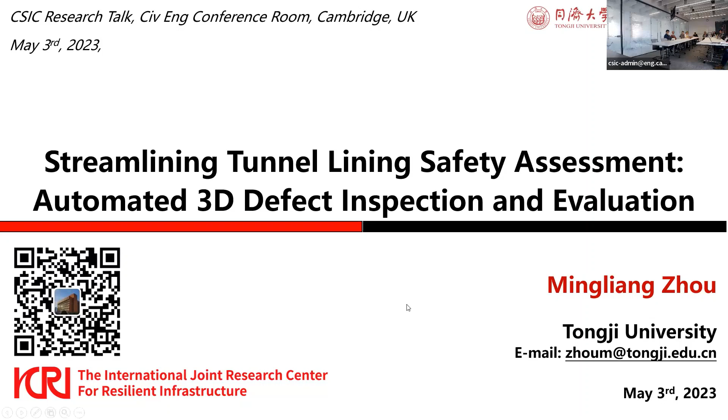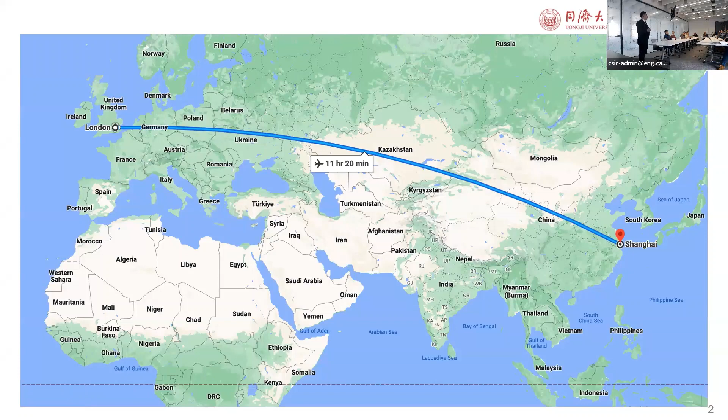For those of you who haven't been to Shanghai, I would like to invite you all to go. It's about a 12-hour direct flight; if not, maybe take another extra few hours. We have a nice campus. This is the main campus in the city, not far from the city center, about 20 minutes away.

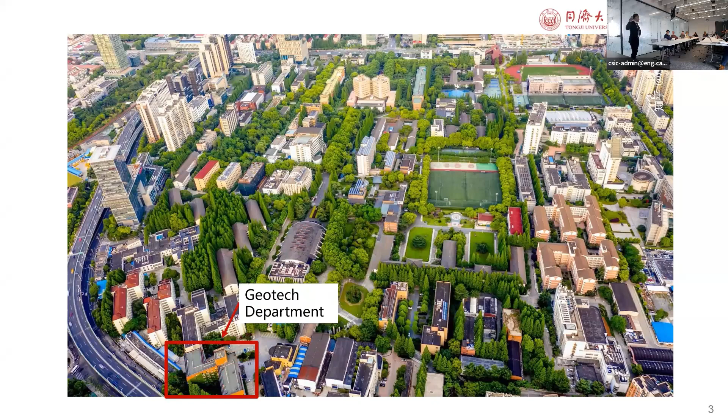We have a metro station just in front of the gate of the main campus called Tongji Station. We have the Civil Engineering College and the Geotech department, and we also have a centrifuge just opposite the main building. It's a quite nice campus.

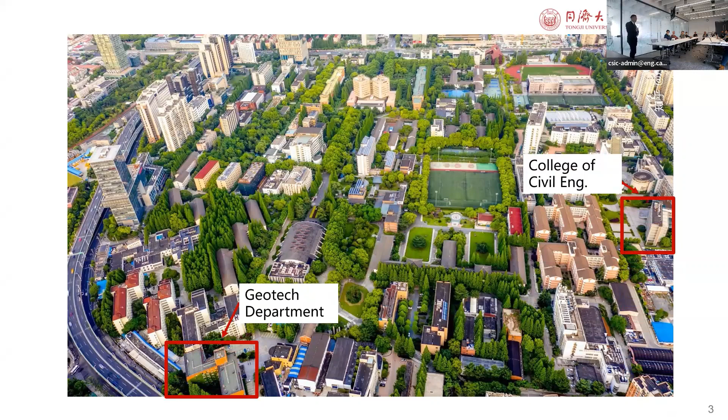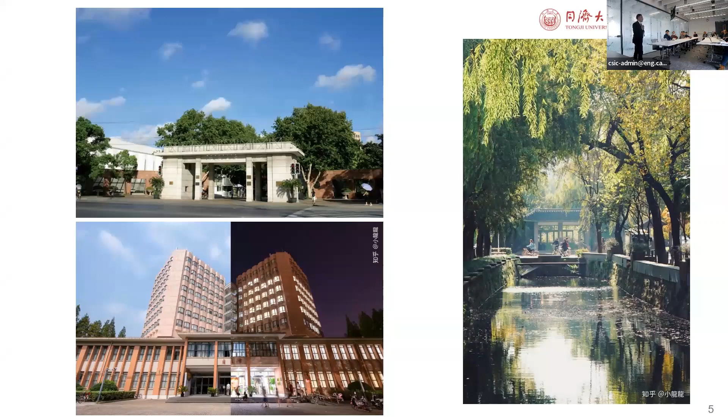We just passed the cherry blossom season about a month ago, so if you have a chance, you should go around the end of March or early April. We have nice gardens, and this is a library, and that's the front gate. Just to give you a flavor, you should visit at some point.

I think it would be nice to introduce my background and let you know a little bit about myself. As Brian introduced, I did most of my study in Cambridge. I did my BA at Caius, and I was a college member with Caius.

Then I did computer vision with Kenichi for my MPhil project, and my PhD was funded by a Japanese company called JOGMEC on methane hydrate production, where I did multi-physics simulation.

Then I went on to a company called Mole Solutions, which specializes in underground logistics. Back then, Professor Robert Mair was a really good friend of the company and was really supportive of this idea of putting all the logistics into underground pipelines.

Then I decided to move back to Shanghai and join the tunneling group, and I did a postdoc with the group. Then I stayed at Tongji Civil Engineering College as faculty. So that's my brief background.

For my topic today, I think for those of you who have worked with tunneling or not, in tunneling, especially in cities, we often face this type of disturbance from excavations. You always want to build buildings nearby or do excavation for a new tunnel. That's typical in Shanghai. I'm sure that happens in London sometimes too, but not as often as in Shanghai. Surely every mega city faces this type of problem.

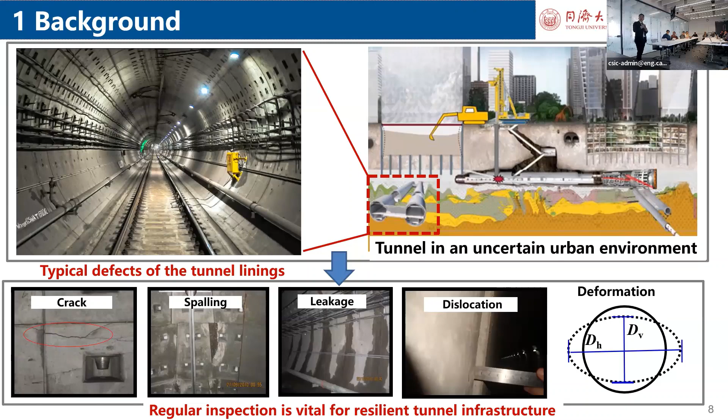As infrastructure ages, in tunnels you always face these types of defects: cracks, spalling, leakage. And if it's a segmental shield tunnel, then you also have dislocations and typical deformations.

Back in the days when I did the MPhil project with Kenichi, we did manual inspection. You'd go down the tunnel at midnight and use your own eyes to try to identify cracks or leakages, and take total station measurements if you had them.

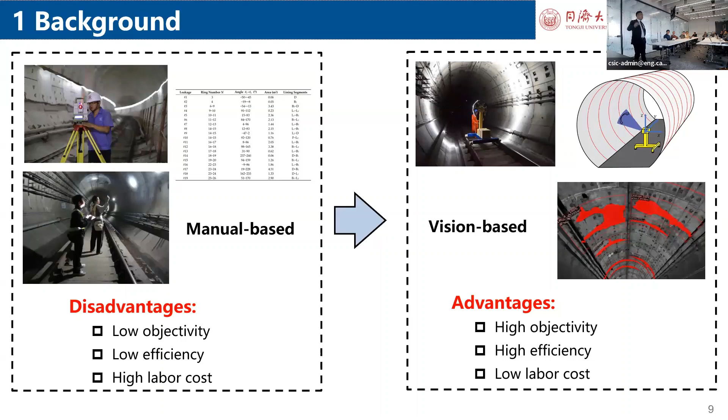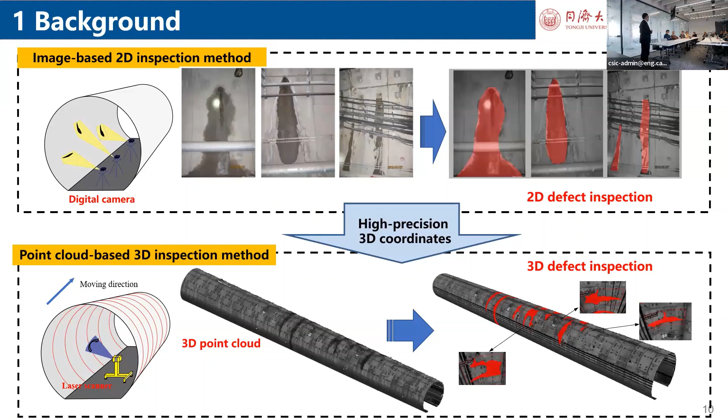But nowadays, for the last decade or so, a lot of researchers have advanced the technology to do vision-based inspection, either with cameras or laser scanners. There are two typical approaches: you either take 2D images and try to identify where the cracks or defects are, or lately a lot of focus has been on 3D inspection, trying to obtain the whole picture and location of the defects.

For defect inspection at Tongji, we used the Topospec Z+F profiler, a German company's product. We built a small EV to carry that profiler's laser scanner to get the cross sections of all the tunnel linings and obtain the point cloud data.

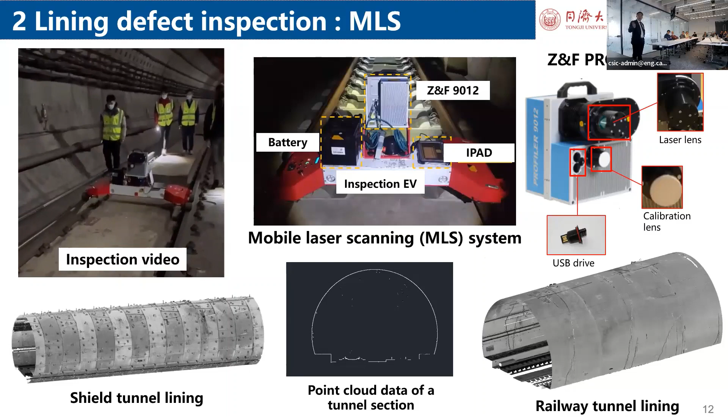So this is very efficient, and you can get a really nice amount of data from the shield tunnel. And based on the data, you can do data analysis about the deformation, because it's a profiler - each cross section, each minute, gives you about 1 million points.

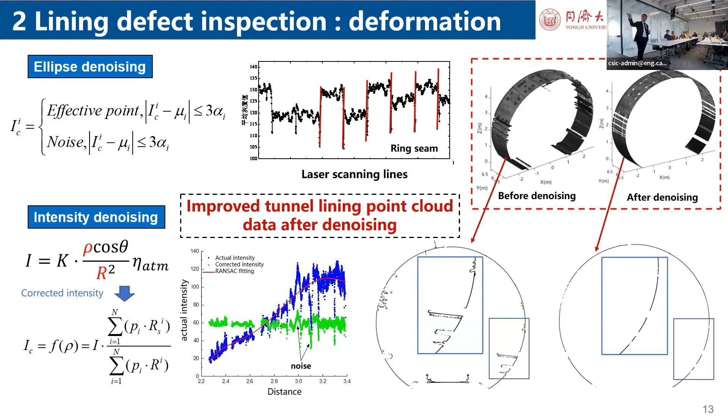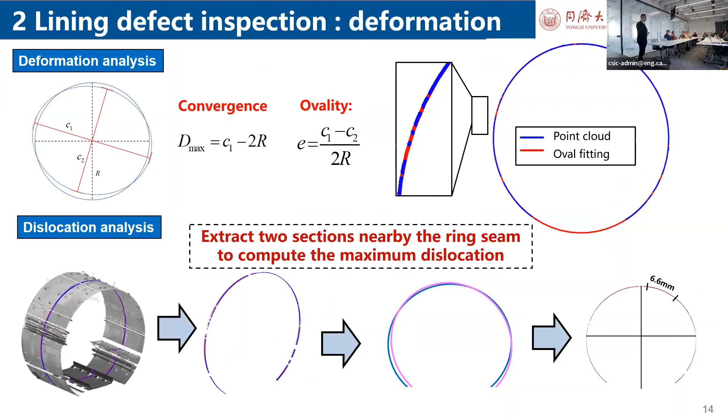So for a typical shield tunnel, we usually make some assumptions of the possible shape. Ellipse is always the logical one to go first. If you do some surface fitting and point cloud denoising, you'll be able to get a pretty good shape of the shield tunnel. Then you can calculate the convergence of the tunnel, and also extract the segments next to each other to work out the dislocations. That's for the deformation part.

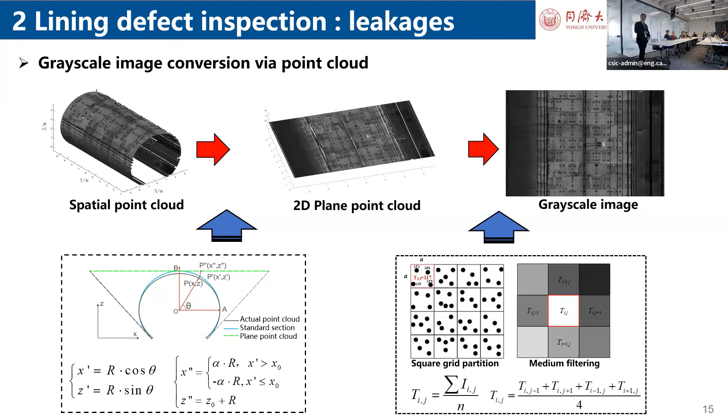Moving on to some of the surface defects, leakage is an example. As point cloud data, one of the good things is you can convert it into a 2D grayscale image, because the point cloud from the laser scanner is essentially the intensity or reflectivity of the surface. So you can convert that into a grayscale image and use typical image analysis, or nowadays we use a lot of deep learning algorithms to extract your target object.

Here we specifically used Mask R-CNN - that was proposed by Facebook about 5 years ago. We used this specific algorithm but upgraded it for the specific task of leakage detection. This differs from typical image segmentation tasks because we know the sense of the location.

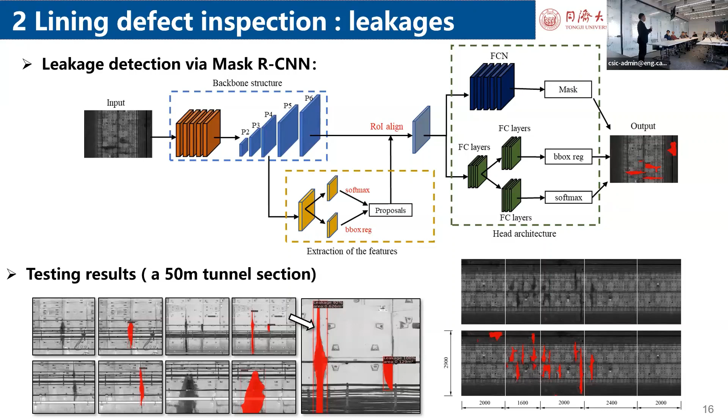Because the laser scanner gives you the location of each point, you'll be able to calculate the leakage area as well as its location. So from that whole process, you can tell exactly the leakage area and where the leakage is located at your cross section, which segments. With that, you can generate a report of the leakages.

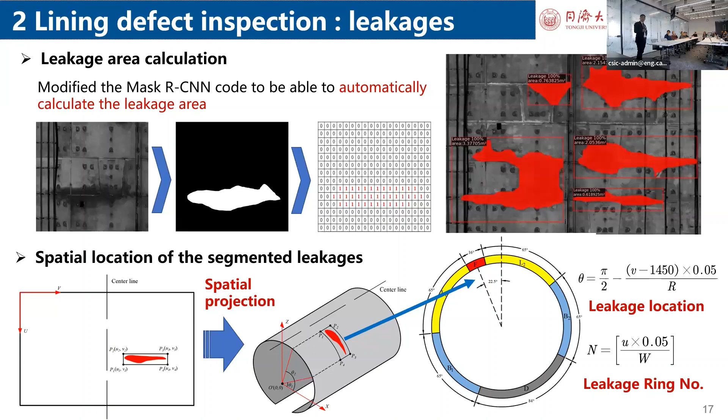Another typical problem for the tunnel is spalling. Spalling is, in fact, a 3D defect. But most of the time, if you only take an image, you'll treat it as 2D. If you treat it as 2D, first of all you won't get really good segmentation results, and second, you won't be able to extract the volume of the spalling. So you won't be able to provide the operational company of the metro tunnel with strategies for maintenance of that spalling defect.

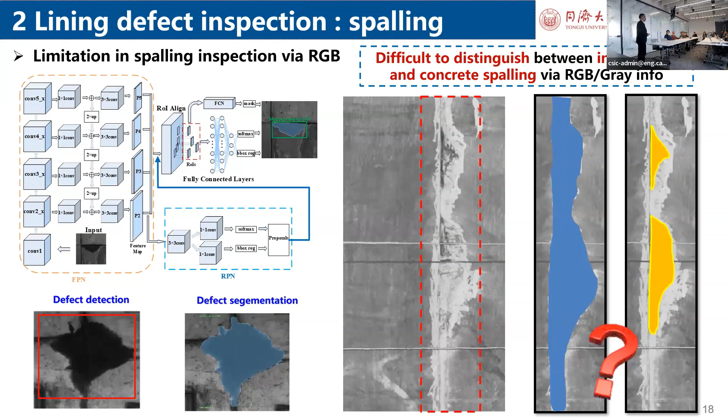To address this issue, we proposed a new network called StreamNet. The idea is basically combining the intensity image, or grayscale image, from the point cloud together with the depth image. Because the laser scanner can give you the dimension in XYZ, you'll be able to convert your data in that direction to a depth image.

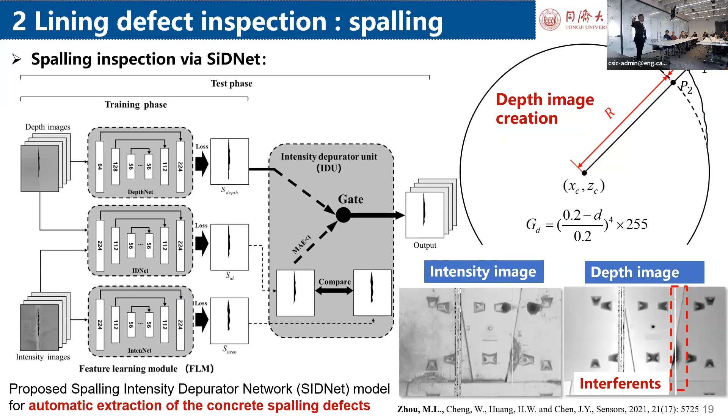With that, for each spalling defect, you'll have one intensity image as well as a depth image. Then we created this specific network to combine the depth image and the intensity image, fusing the prediction results to give you a better sense of where the spalling defect is. With that, you'll be able to calculate the 3D volume of that specific spalling defect. And as we compared with some state-of-the-art deep learning and image processing techniques, we got better results.

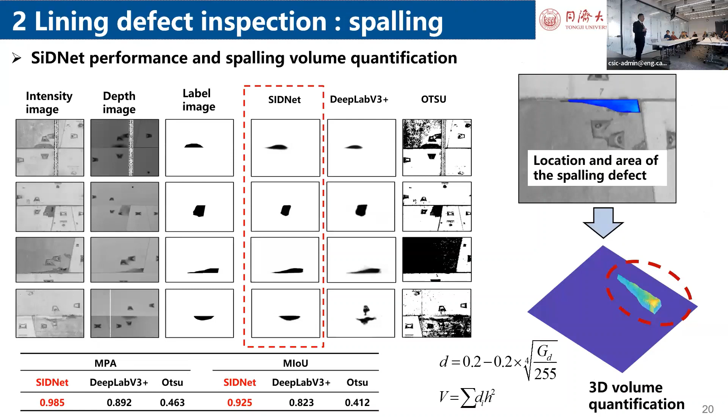Another issue - I'm not sure about the specification in the UK, but in China, in order to inspect the tunnel, we also focus on cracks. In Chinese code, you need to be able to tell if there is a 0.2 millimeter crack; if there's a larger crack than 0.2 millimeters, you should inform the operation company to do something. That's quite challenging, because for the laser scanner, the resolution is usually around 1 millimeter.

Even the state-of-the-art system we use is about 0.5 to 1 millimeter, that's the maximum resolution you could reach. That's why a lot of focus was done on the linear camera system. The advantage of this system is it's very efficient, and because of the strong illumination and high resolution of the linear scan camera, it can give you a really high spec of the images.

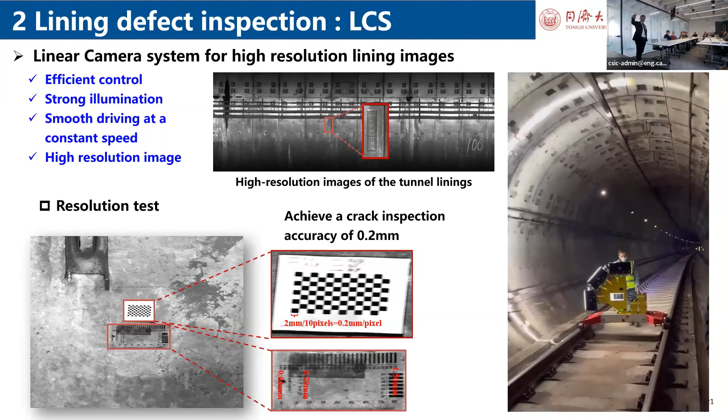As you can see, we did a few tests in the tunnel. It can give you about 0.1 to 0.2 millimeter resolution, which is really high resolution. It really needs high spec cameras and high aligned illumination of the linear lights, and also the control of everything together.

And with that image we acquired, we proposed the PANet plus A-star algorithm.

For most of the algorithms, or the guys doing computer vision, a lot of them have done crack detection, and it's a classical problem for any concrete structure or geotech structure. But the problem for most crack detection algorithms is they have crack disjoints, because crack is such a fine detail object. In comparison to leakage and spalling, it's very difficult to detect, and usually there's disjoints between the cracks. And because the accuracy of crack detection required by regulation is strict, you need really good continuous crack detection to be able to quantify it later on.

That's why we proposed PANet, to fuse different parts of the outcome of the image and try to extract the fine detail of the cracks.

And in order to really get the correct quantified crack width and length accurately, we use this searching algorithm called A-star. Most crack quantification methods use the middle axis approach. So if you identify a crack, you just use the middle axis, assuming if it's a 2 millimeter crack, you take the middle axis and calculate the length. But that sometimes leads to about 10% error if you do that simple approach.

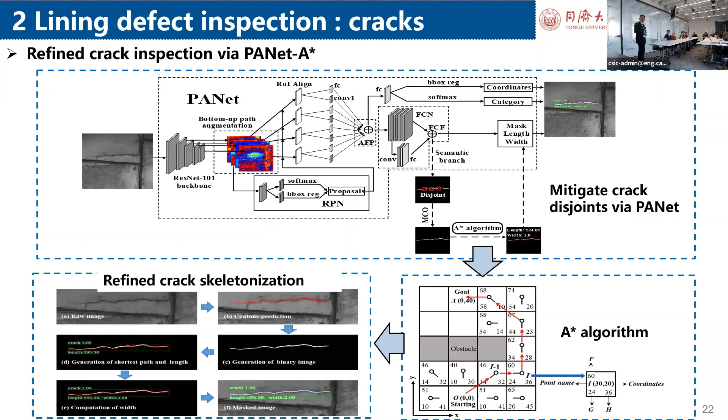That's why we try to use this A-star algorithm to give you better crack detection performance. If you compare our algorithm to some of the other state-of-the-art ones, you can see some immediate improvements as well as in the quantification. We call it skeletonization, to get better accuracy of the cracks.

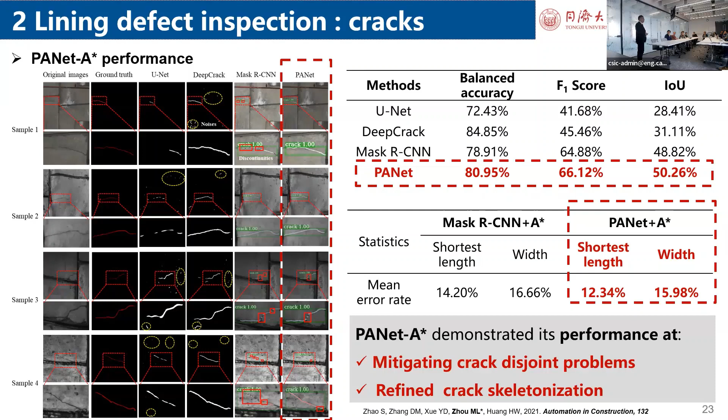That's the defect part. So towards the future, we have the concept of combining the laser scan and the linear cameras. Those are the prototype models we are building for the track and also for the highway tunnels. By combining those two, we think we should be able to capture most of the information we require for both the deformation, the surface defects, and the fine crack defects.

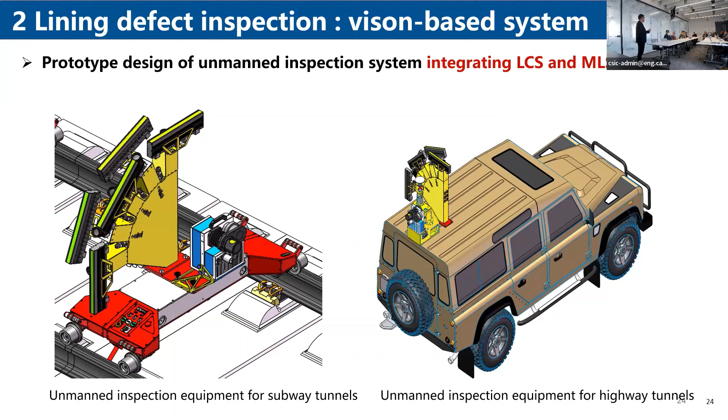And with that information you've got, the target usually is you need to tell your clients whether my tunnel is good enough, is it safe or not, should I do something. To do the tunnel lining safety assessment, most of the approach we do nowadays is as I showed you: you take a lot of images and point cloud data at night, and you process it for the next week or so, then you give the client a report.

But that's not good enough, because sometimes you want to have real-time results to show your client, so the client can go to the cloud or the desktop to see if there's any problem.

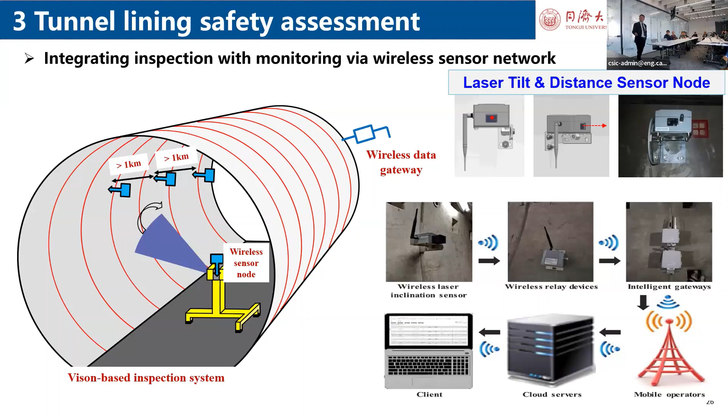So for this, we try to combine the inspection technique together with the monitoring technique. We implemented some laser tilt and distance sensor nodes at the tunnel lining, and these sensor nodes can talk to the inspection equipment. So the inspection equipment together with the monitoring equipment combine to become a mesh network. With that, you will be able to create a system which can not only do monitoring, but also give the inspection results together as a network.

This guy, I think, is quite closely associated with CSIC. He's one of the early doctors who worked with Kenichi on mesh nets and wireless sensor networks. So we worked with him as well. He's now based in a city near Shanghai, and we worked with him to implement those sensor nodes in the tunnel.

With this sensor node, you will be able to adjust your frequency to get the distance. So it's essentially the convergence, and also tilt, which is the rotation of your structure.

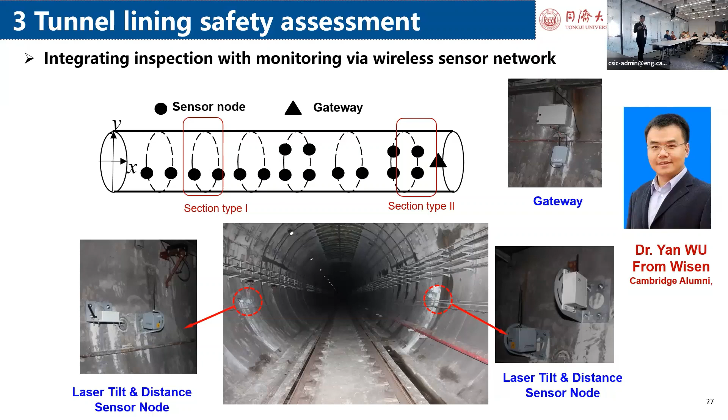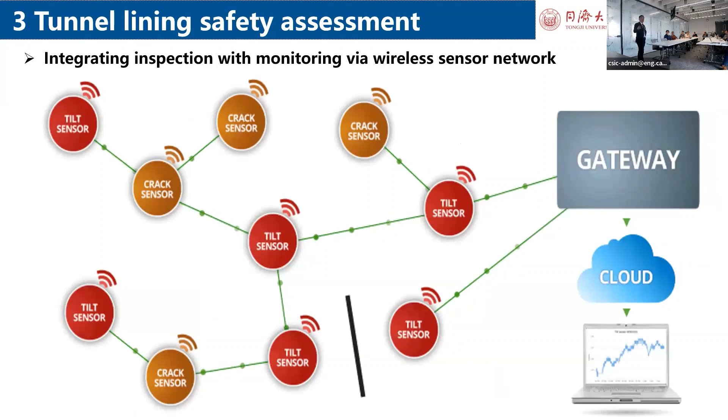You can consider our inspection equipment as one of the sensor nodes. So with that mesh network, you will be able to collect data from both the monitoring and the inspection through the gateway and to the cloud to process it.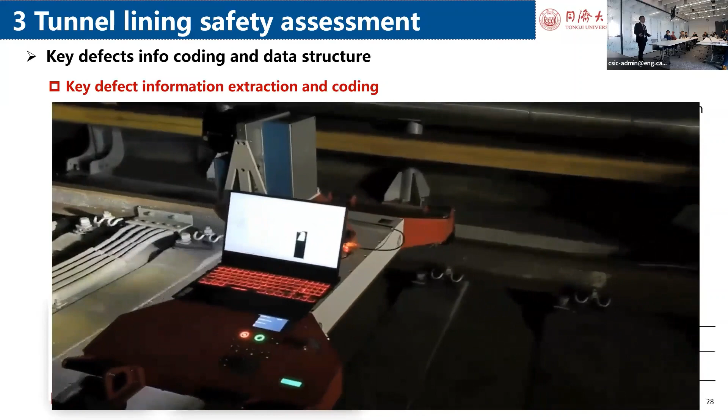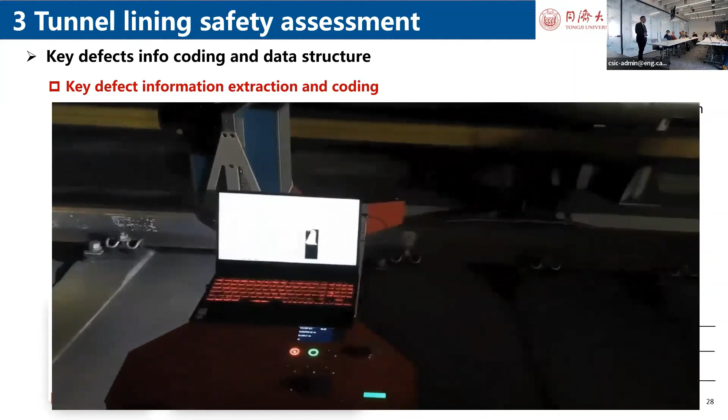This is one of the concepts we try to show: although this laptop is on the EV, imagine that laptop is sitting in your office. You will be able to see during the inspection what the defect looks like and the key defect information. So whoever is doing operation down the tunnel, and the management level, can see it at their office.

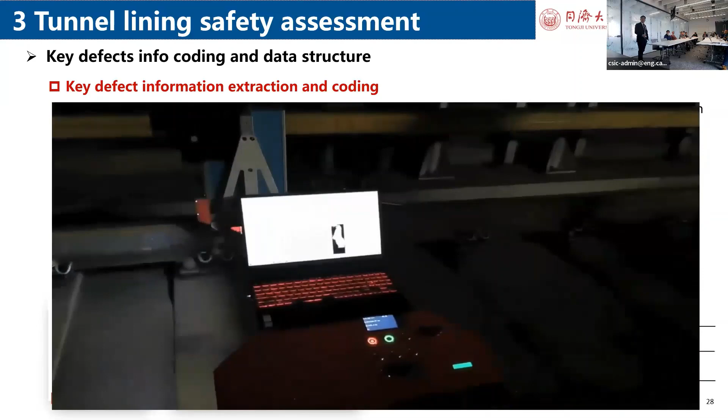We also say that in order to process that data on site, you need to introduce some of the edge computing idea. Essentially, you need to streamline all the data to allow the on-site small desktop or edge computing process to handle it. So you need to define what defect data you want, what the data structure is, and also allow some of the monitoring data to be processed before presenting it to those concerned about what strategy to maintain the tunnel. So those steps should be done at the site to give a nice data structure to present on the desktop.

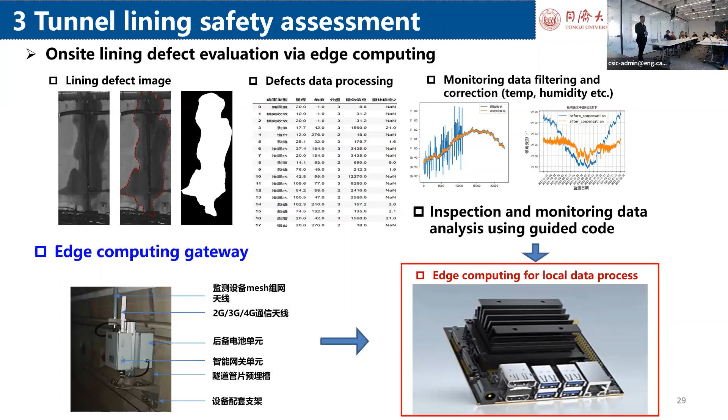With all the defects and the data structure organized, when you try to assess how good the tunnel is, it's a multi-aspect problem. So that's sort of the indexes we try to propose.

We look at both transverse and longitudinal deformation information obtained from the laser scanner, together with some surface defects shown through the computer vision technique, like cracks and leakage. We consider both typical geometries - the length or the width - and also fractal numbers to look at the pattern and complexity of your crack, spalling, and leakage patterns.

That gives you information because the pattern of a shear crack, a compression crack, and other types of crack is different. Similarly with leakage, the shape of the leakage gives you underlying information about how your structure is behaving.

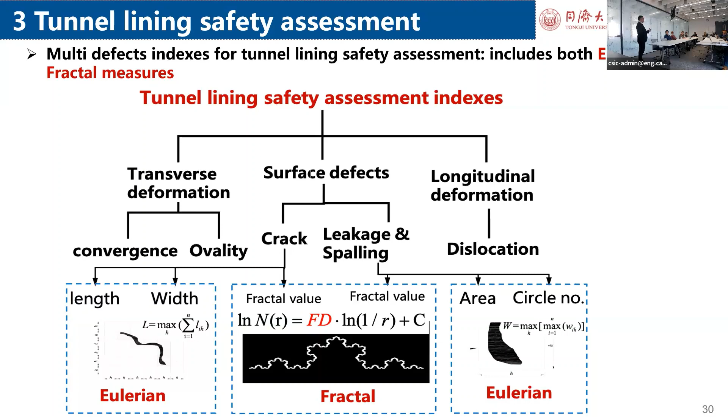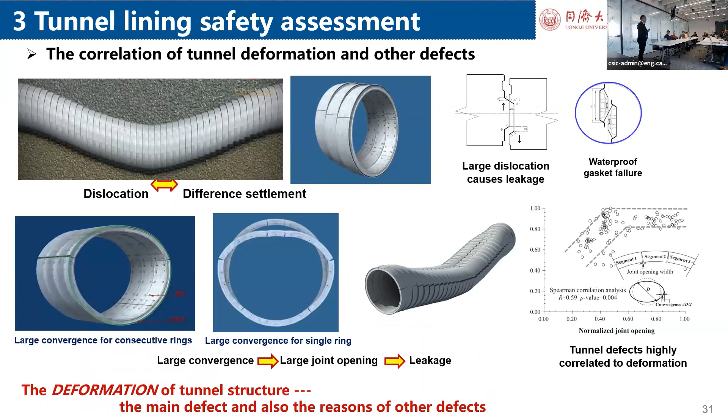So with that index set up, another aspect to look at is the intercorrelation between different defects. Essentially, if there's deformation, it can lead to joint openings and maybe leakage. So the intercorrelation between defects is also an important aspect to consider for your indexes.

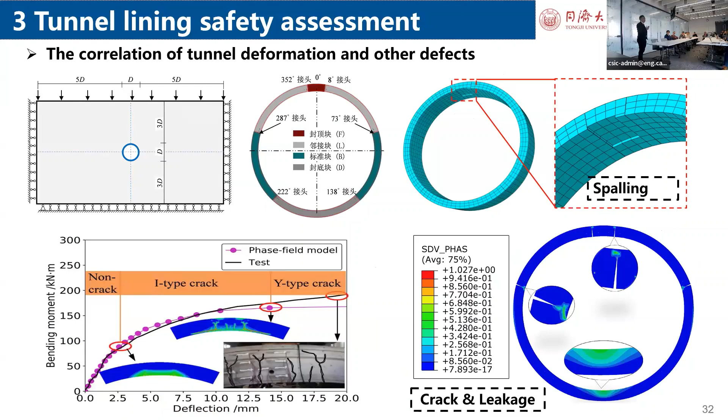The way we try to consider it is we did some numerical analysis to see how spalling and deformation correlate with each other, and how crack and leakage correlate with each other if there's a loading around it. With that, we're able to set up some correlation matrices.

The technique we used here is called a copula function. This function was originally proposed by economists. They try to see the interlink between two factors and how they affect each other. So we use this function to identify how each two defects affect each other and to assign appropriate weights.

Based on the amount of data you collected from tunnels in your region - for example, if you're concerned with tunnels in Shanghai, you can collect data from say 20 tunnels - you will be able to see how the data is clustered. With that, you can use a classification algorithm, k-means, which is a form of machine learning clustering.

Based on the clustering method, you will be able to cluster your data into different safety levels. With that, you use the data-driven approach to tell which class the tunnel region you're concerned with falls into. So this is a data-driven approach, but typically when we do safety assessment, we usually set some threshold - say if the deformation is larger than 10 millimeters, it's no good, or if there are certain cracks or leakage, it's no good.

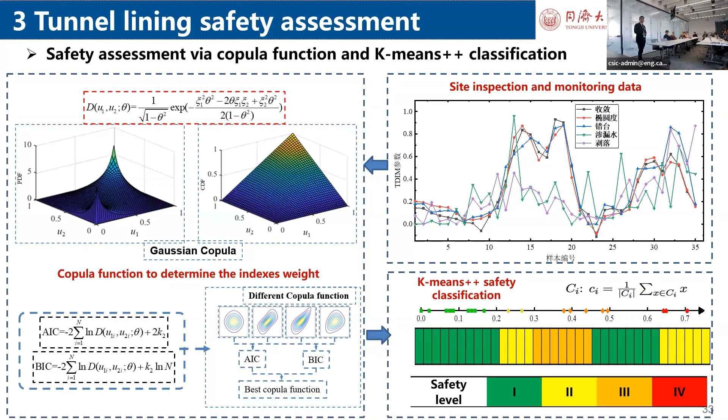That's still good, but that's more sort of... that doesn't really reflect what's happening for your region. So this approach, we believe, can be fit for different locations based on the data you obtain from your region. You can group them and say, for our case, maybe 10 millimeters is acceptable, or 20 millimeters is acceptable. So this classification method becomes important.

This is one of the cases we did in 2019, where there was a gushing problem during construction. In the construction process, we had a settlement larger than 60 centimeters. That's quite an emergency matter, and if we don't treat it in time, it can affect more than 1 million people.

So what we did is basically implement the sensor node as I introduced, and we took readings every minute to see the convergence and rotation of the structure. We also did inspections, trying to identify the cracks, defects, and some spalling places. Then we did numerical analysis to understand, for this about 50-meter section, the safety level and structural safety level.

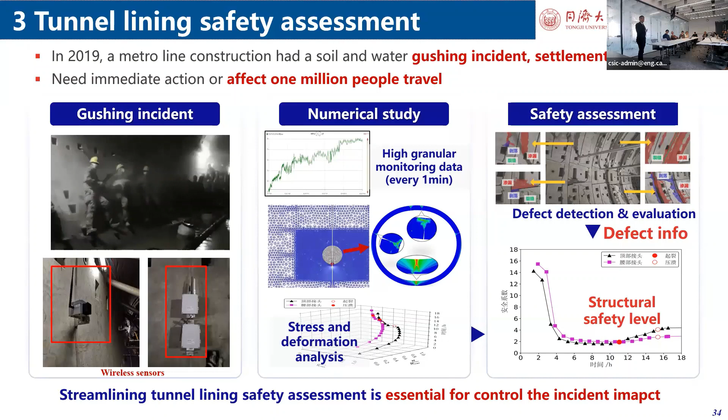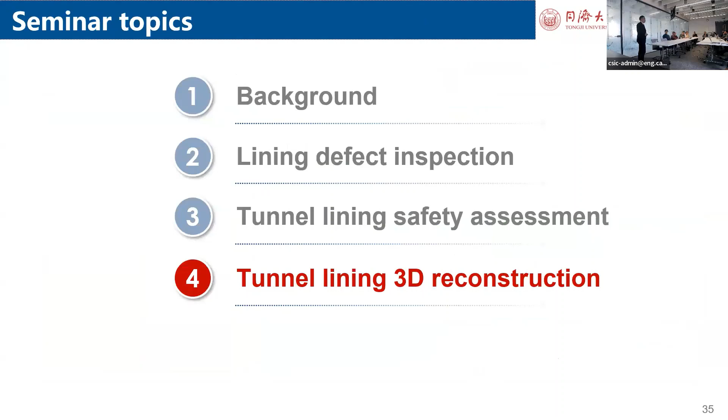Then we provided essential guidance to allow the on-site maintenance people to make the right decision. So combining both inspection and monitoring can be very important if an emergency happens. With all that information, our vision is not only to present it in 2D, but also to put every piece of information into a 3D model, so any inspectors or management level can see the safety status of the tunnel.

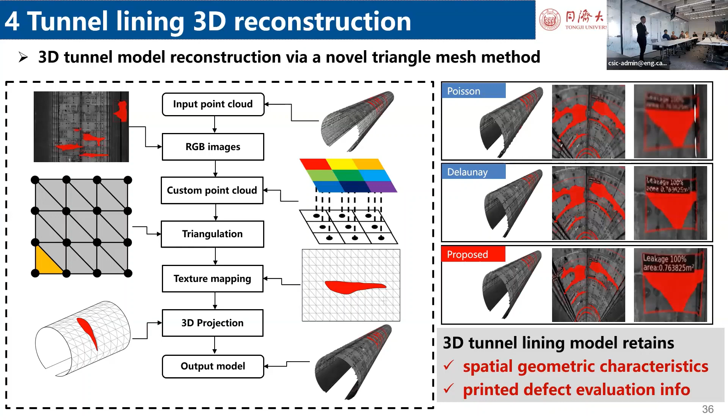So with that, we proposed a triangular mesh method. The idea is actually quite simple: we wanted to have not only the texture of your defect, but also the quantified numbers and some information printed onto the tunnel, on the 3D model. So this model was proposed specifically for that task.

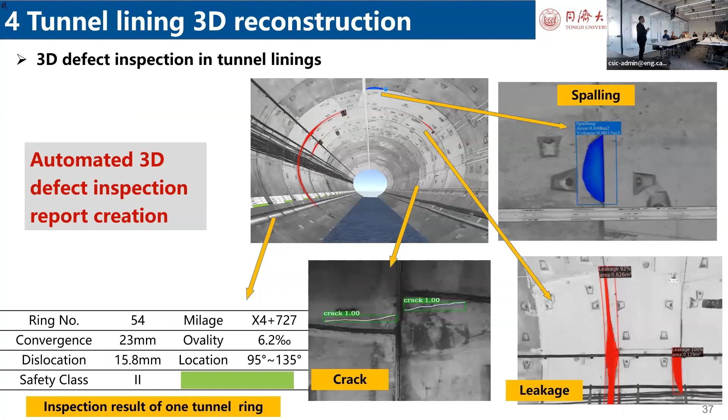With that model, you'll be able to see all the fine details of where the leakage, spalling, and cracks are, and you also have a little inspection table printed on your 3D model, which can be quite handy for the management level to make the right decision. And you can also generate a report automatically.

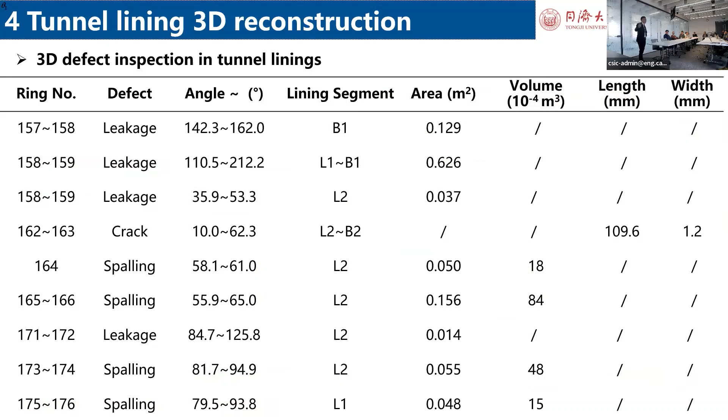This is typically a report from 10 years ago, when I'd go down to the tunnel at midnight and just use a handwritten table. But nowadays, you can just generate that report automatically after your inspection.

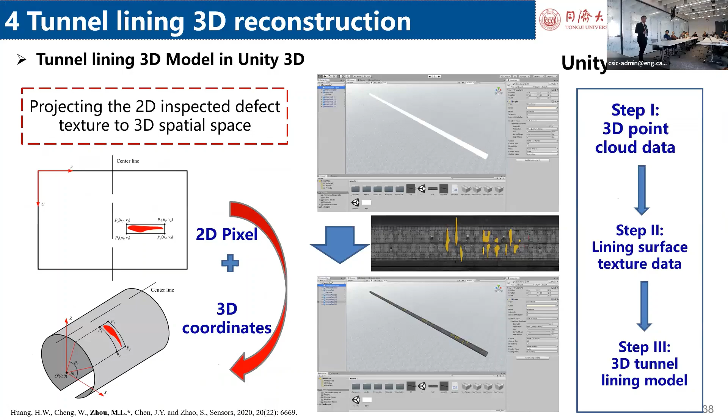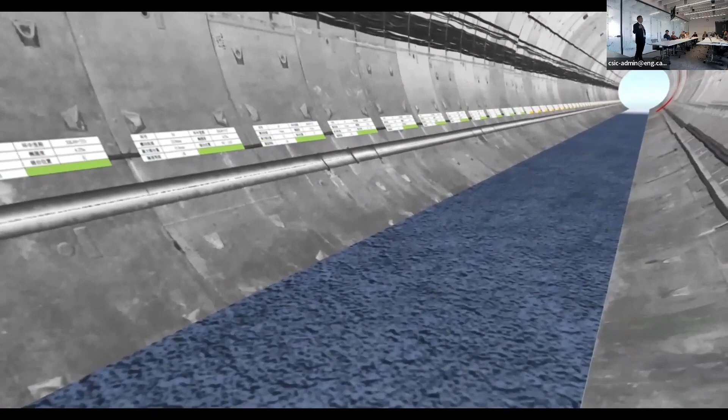With that, we took a step beyond and tried to integrate the model with Unity 3D, a typical game engine that's been widely used in the industry. Integrating that model into the game engine gives you leverage for a really nice 3D model, and you can use either VR or MR glasses to allow the developer to see what the tunnel is doing and where the places are that I should go to treat it.

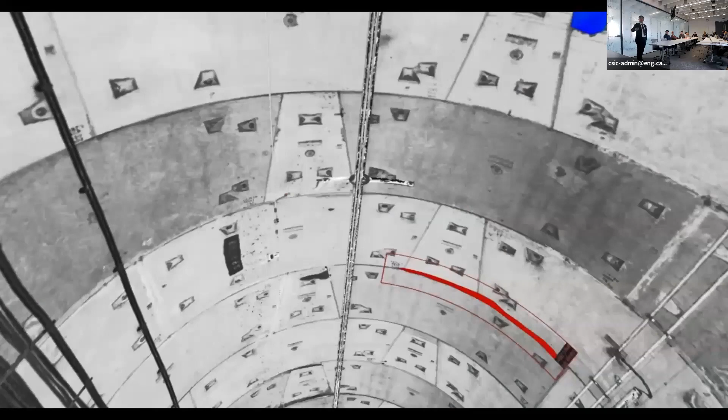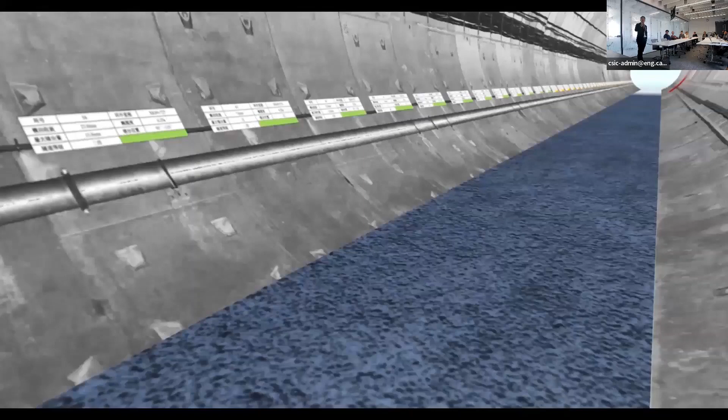The table at the bottom is good to see—if it's green, then this section is not too bad, and if it goes to orange or red, then I probably should do more with my tunnel.